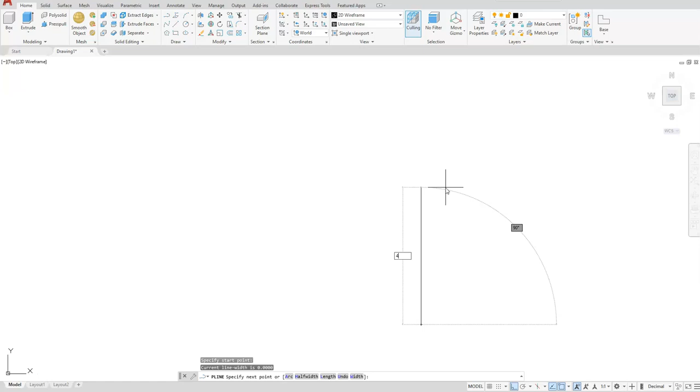Okay, so let's start with a polyline. Click here. I'll go up a distance of 46. I'll go to the left a distance of 131.

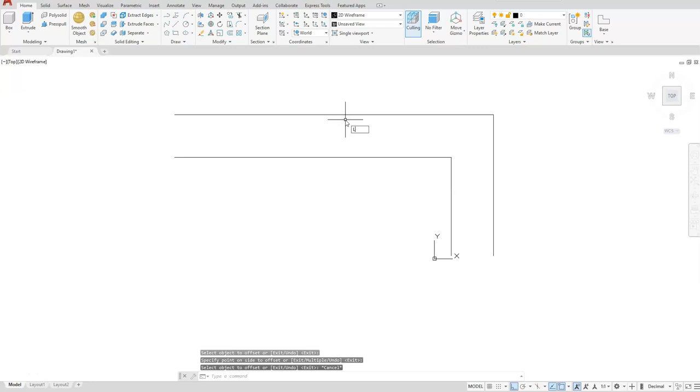Offset. Distance will be 20. I'll draw lines to connect the endpoints.

Next, I'll create a rectangle. Click this as my start point. And the other endpoint or coordinate that I'm going to need to achieve this should be 20, 46.

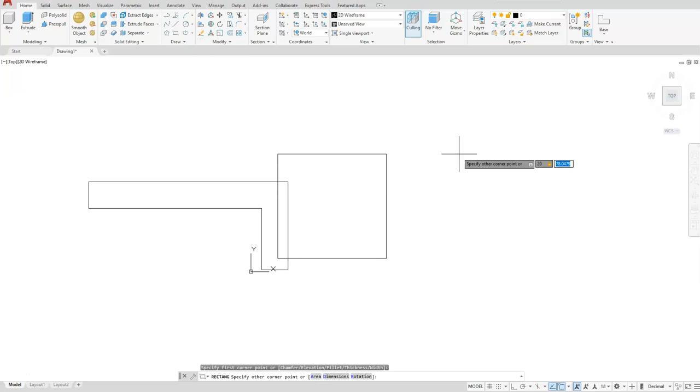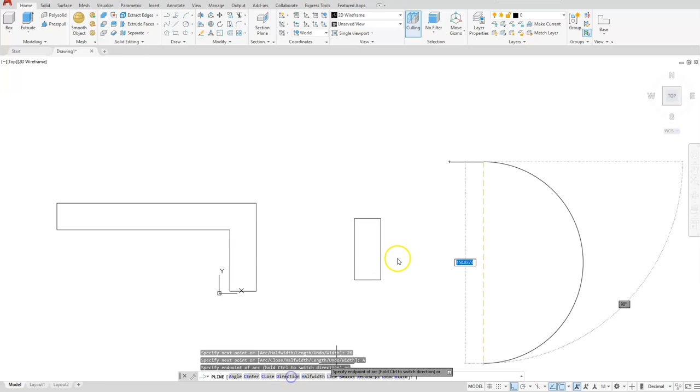Next, I'll create one of my slots, and I'll use a polyline. Go this direction, 26. Then I will switch to the arc that's on polyline. Come down a distance of 12. Switch back to line, go this direction, 26. Select arc, then close.

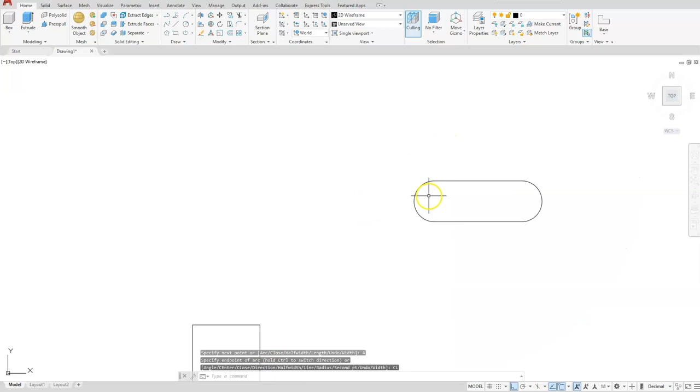Let's go ahead and create another one of our shapes that we're going to need. This is going to be the part in the front. So I'll start with a polyline. I'm going to go down a distance of 30.

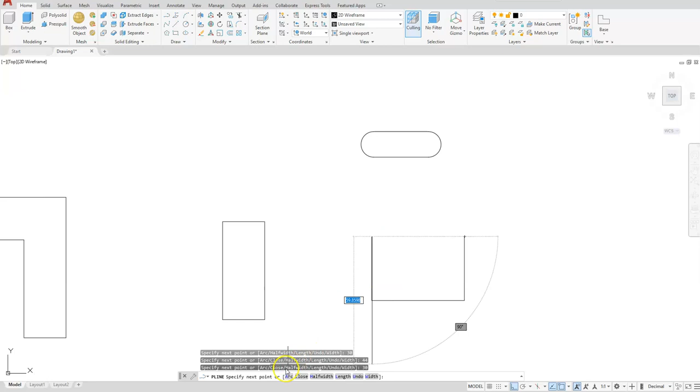Go to the left a distance of 44. Go up a distance of 30. And since I'm using a polyline again, I'm going to choose arc, and then I'll choose the word close.

I'll create a circle at the center of this arc. Circle, center diameter. At this center, the diameter will be 22.

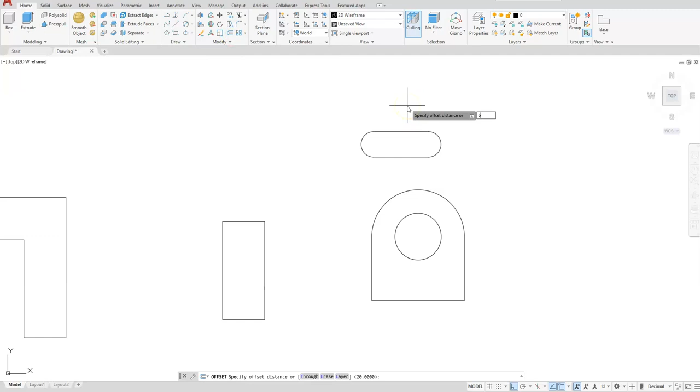On our slot here at the top, let's go ahead and create an offset. So go to offset, make your distance 6, and offset that slot.

I'll create one more circle that I'll need later. But now that I think about it, I'll go ahead and save that cylinder for using some of the primitive commands.

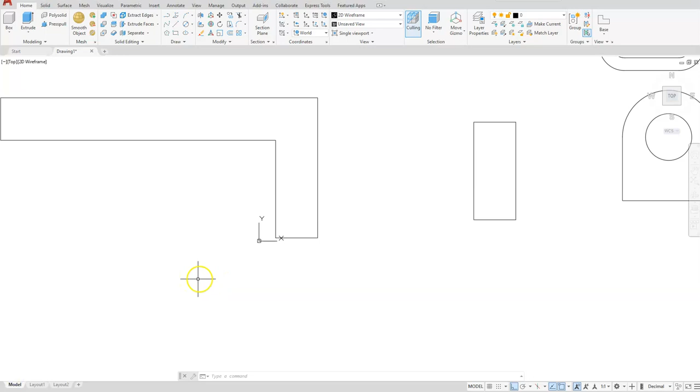Let's look at this at an isometric view.

Then I'll do some extrusions. So I'll choose extrude, select this shape.

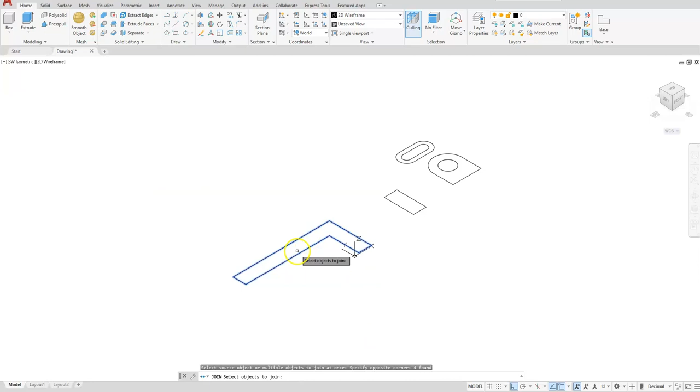And now I do notice that these shapes are two individual ones. So escape out of that command and join them first. So I'll use join and select this shape. And always check and make sure that you're getting one polyline.

Okay, now let's use the extrude command. Select this shape and send it a distance of 76.

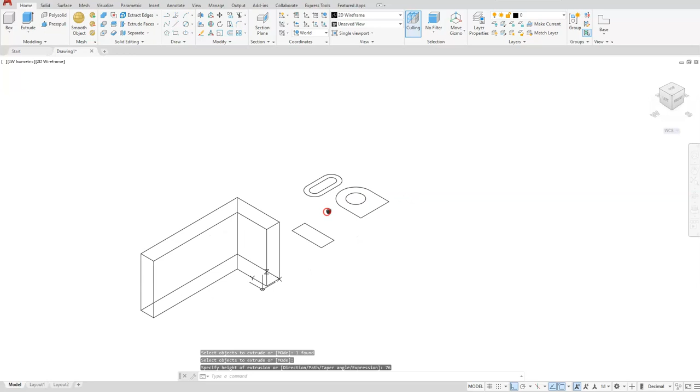Next, let's go ahead and extrude this shape. And the distance on this one will be 6.

I'm going to extrude just this outside shape. And I'm going to make sure that I'm going in the down direction or downward direction, a height of 6.

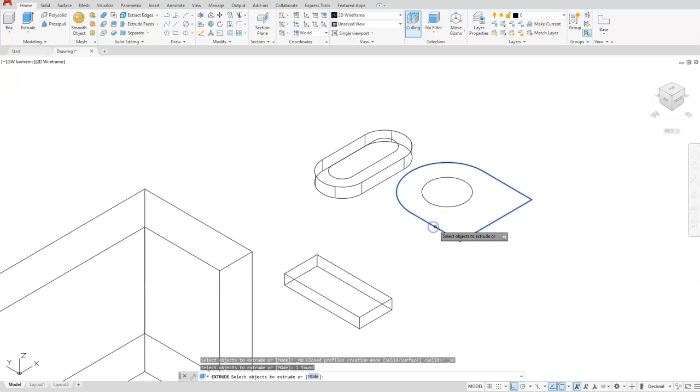And with this one, I'm just going to extrude it a very big number, but I'm only going to select this outside one. So I'll go to extrude, select that shape, and I'll come down a distance. Let's make it 80 just to make sure that it's big enough to go through our object.

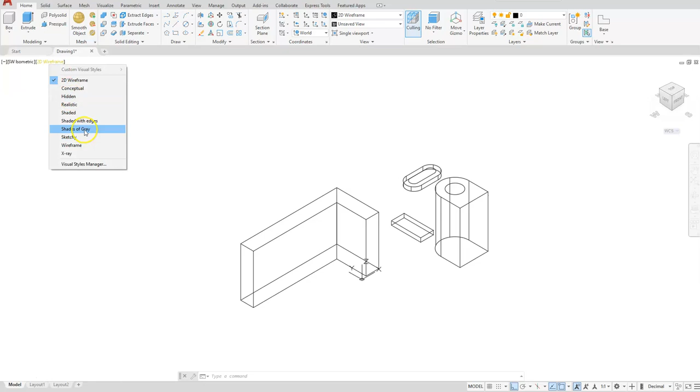Okay, so now I'm going to start turning some shapes and manipulating them the way I want them to look. So I'm going to switch over to the shades of gray. Then I will take a look at my rotate gizmo.

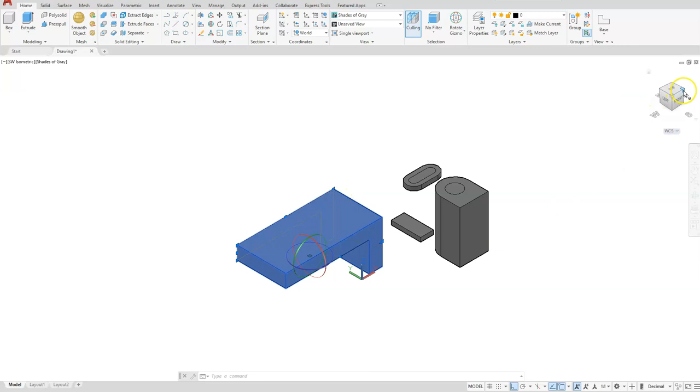Select the shape, select the red axis, and I'm just going to stand this one up. I'm going to rotate just around to this front view of this one.

And now I will put my block on the front of this one. So make sure you hit the escape button twice to clear out the rotate gizmo on that object.

Select this one. I'm going to do the red axis first, and that'll get my shape to stand up. Then I'll select the blue axis and get it to go to the side.

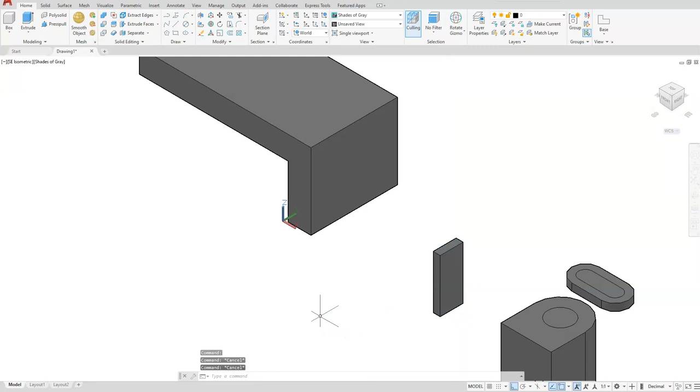Now sometimes it is kind of hard to see because I need to get this back midpoint along that midpoint. So what I'm going to do is switch to a wireframe view.

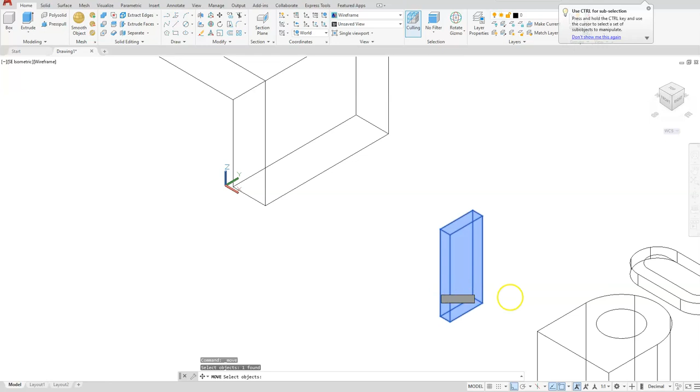Now I'll use the move command. Select this shape. Then I'm going to make sure that I'm selecting this back midpoint, and I'm going to put it at that midpoint.

Now this shape should have went up a little bit higher, and it looks like it's off about a distance of 20. So I'll use my presspull, and I'm only going to select just that face, and I'm going to pull it up a distance of 20.

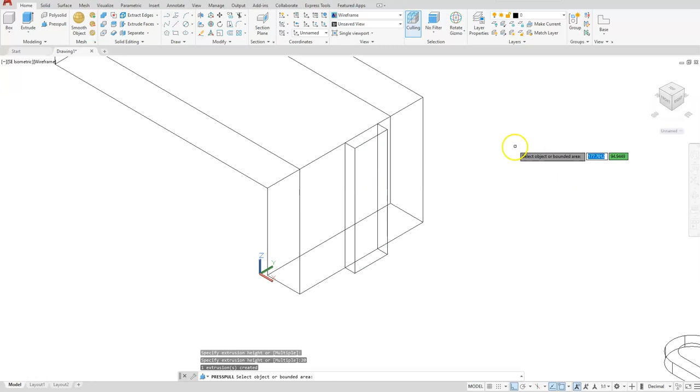These two shapes are almost ready to be union, but I'm going to go ahead and put this shape on first. Then I'll union these together.

Okay, so as long as I'm not in 2D wireframe, I'm in the regular wireframe, I'm going to select these two shapes.

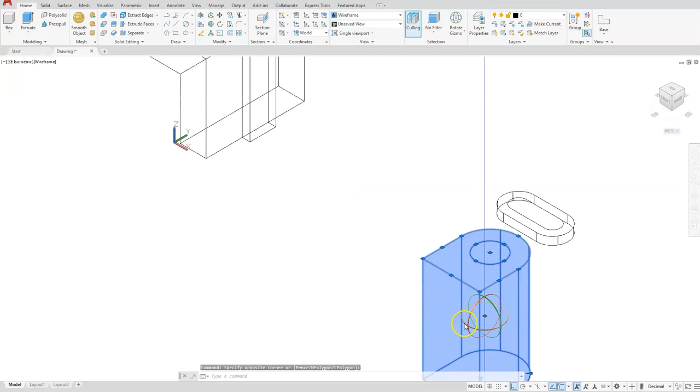I'll turn it sideways with the blue axis, and then I'm going to lay this one down flat with the green axis.

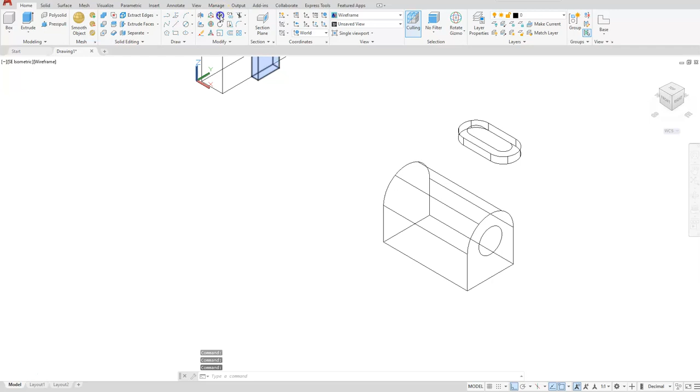I will move this shape from this front midpoint to this midpoint. So I'm just using the regular move. I'm selecting that circle and my shape. I'm going to choose this midpoint, going to this midpoint.

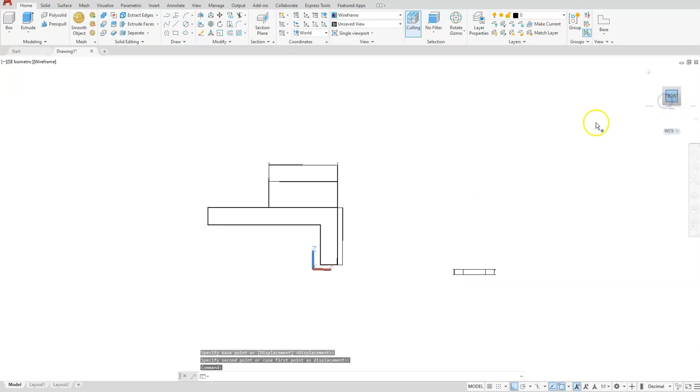If I take a look at this in the front view, you're going to see that that shape is sitting sideways, and I need to rotate that shape back at an angle of 45 degrees.

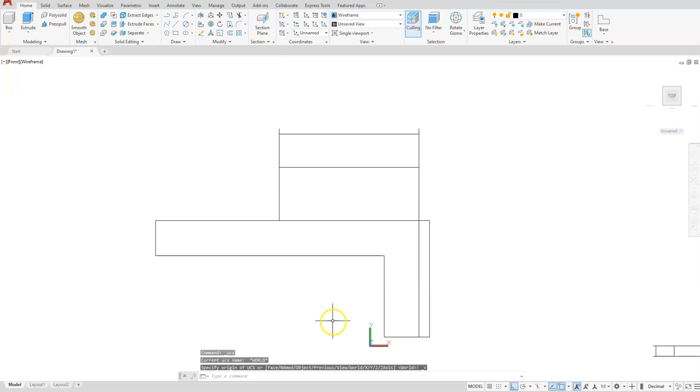So what I'm going to do is change my UCS orientation, and then tell it to align with the view that I currently have. So I have front selected. When I select that button, you're going to see my UCS down here should change. So let's select View. Now you can see that my Y-axis is pointing up and my X-axis is pointing to the right.

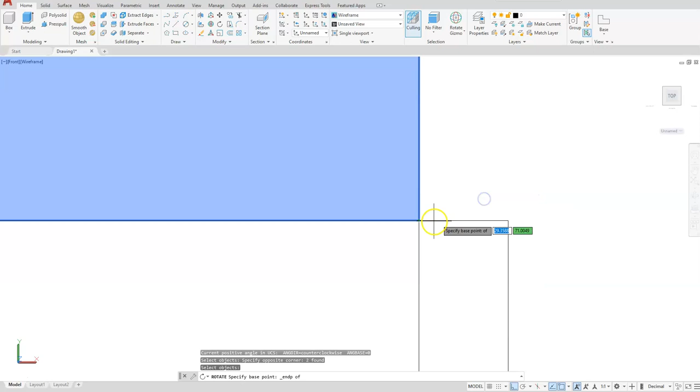This will allow me to use a regular rotate, and I'm going to use a green crossing window just so I can make sure I get that circle that's on the inside. I'm going to select this as my point of rotation, and it should be an end point there. Let me make sure that it will only select an end point.

And now I can use this regular type-in rotation. So I'm going in a counterclockwise rotation, so that number will be positive 45.

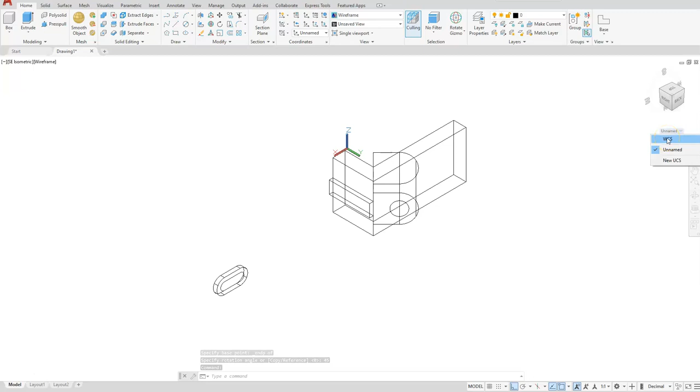If I take back and look at it in isometric, and I'm going to switch my UCS back to the WCS, which is the world coordinate system. I will manipulate this around a little bit. You can see that I do have my shape and it's going right through my object.

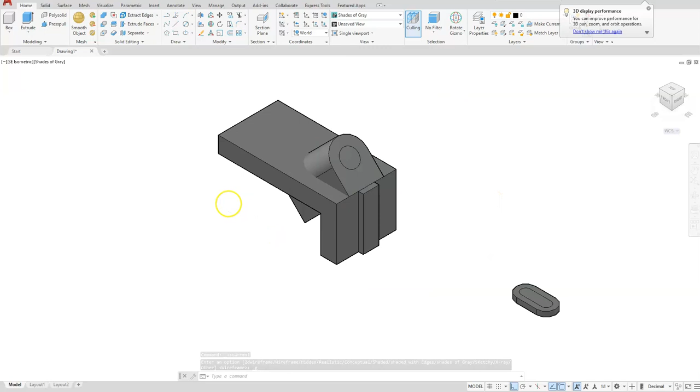Let's take a look at that in the shades of gray so you can actually see what I'm talking about. Okay, so the next thing I do is that I see that I have a part of my shape sticking through this and I want to cut it off right at this location.

So I'm going to use the slice command. In previous versions, you can remember that slice used to look like a little butter knife cutting through a shape. But it's going to be located here.

So I'll select slice. It's asking me what object I want to slice. So I'm going to select the one that's going through my part. After you're done selecting, you're going to have to pick the plane

that is the same as your cutting plane that you're going through this option, or this object. So you can see that this plane is going to be the cutting plane, or the way I want to divide my solid. That happens to be parallel to the XY axis. So if I select XY as one of my options, now it's going to ask me what point on this X and Y plane.

I'm just going to choose this endpoint. And then it asks you, do you want to keep both sides or do you want to discard one? I always just tell it to go ahead and keep both sides. And then I'll physically come back and select that and delete it myself.

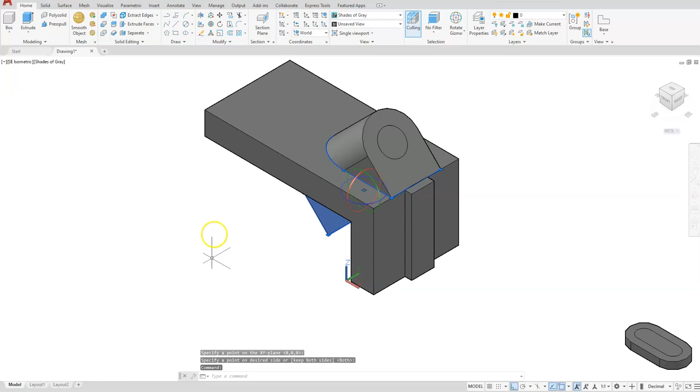So now if I look at this on the front view, you can see that that is no longer the issue of that object going through. It did slice it and it kept the side that I wanted.

I will union these three objects together. So let's go to union. Once again, when you're using the union command, it doesn't matter which order you select these in. But now they're all selected.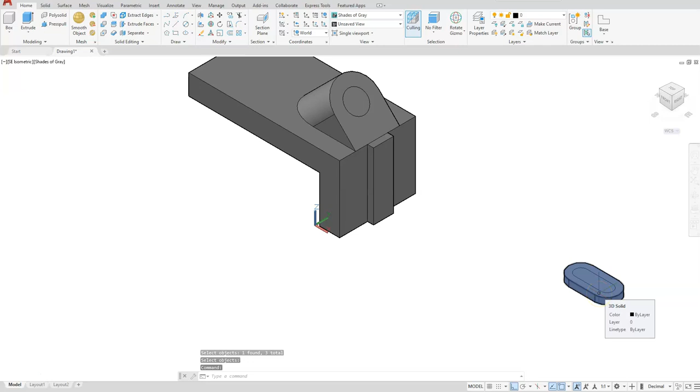Next, I'll put my slot that's located on the back. But actually, before I do that, I'm going to wait till I round these corners, and that way I'll have a center point in common with it. So let's switch over to the fillet edge option.

I'll select the radius at the bottom on your command line. 25 would be my radius.

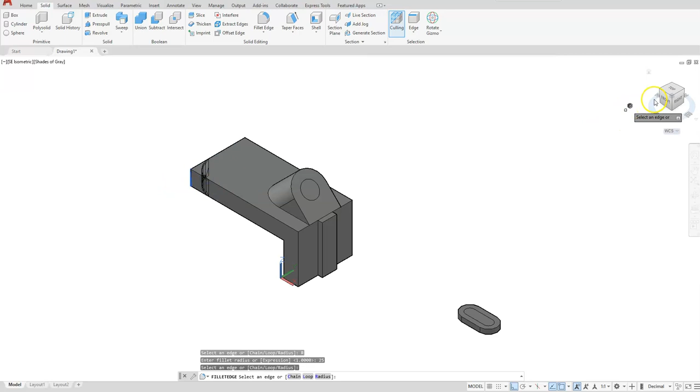Then I'm going to select these corners of what I want to radius. Once you have those two corners selected, remember the enter button to give you a preview, and one more enter will accept it.

Okay, so now I'm going to rotate this shape and make sure that you pick both of those objects. You have a solid and you also have a sketch still left over there. I'll choose the blue axis, just to get it to come sideways.

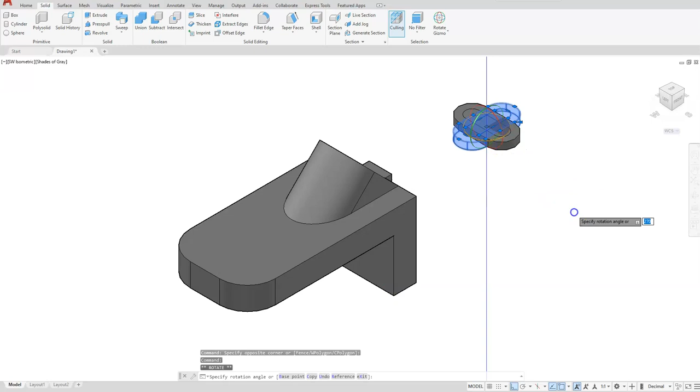Then I'm going to move this object, so I'll switch back over to the Home tab here, and I'm going to move it from the bottom center. Remember that you're going to get two centers that will appear. Choose the bottom one.

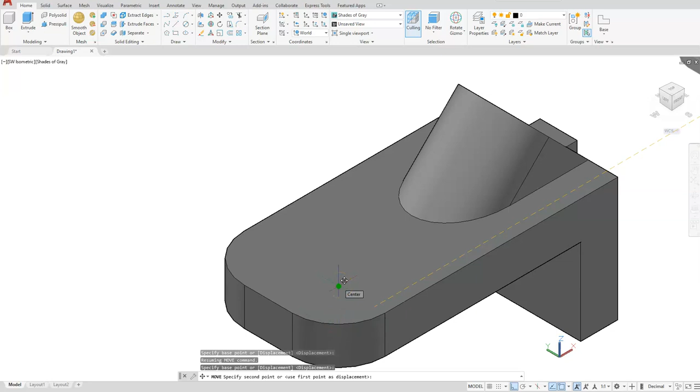And then I want to place it on the center that's located at this arc I just created. So I'll select that center. Let's go ahead and union these two together.

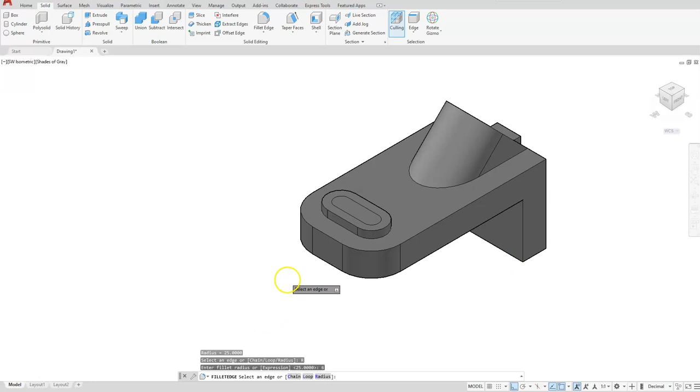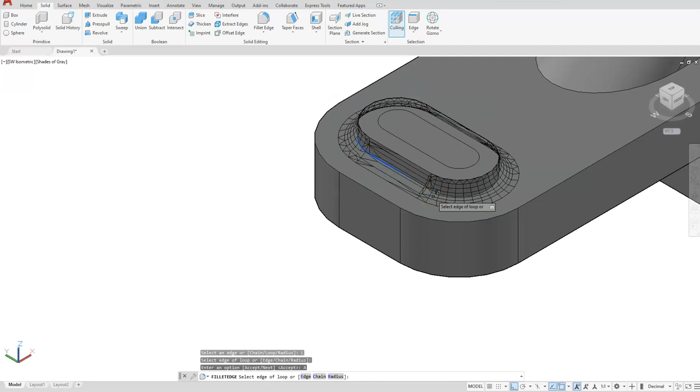Let's do a couple more fillets. In this fillet edge, I'm going to change the radius to 6, and select that bottom edge going around my shape. You can either go around and keep selecting, or use the loop option, where selecting one will loop all the rest for you. Hit Enter to give you the preview, and one more Enter to accept it.

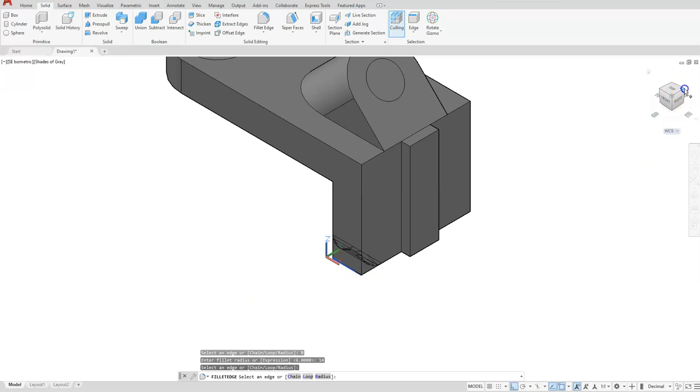Let's take a look at the corners in the back half of this. I'm going to fillet, with a radius of 14. I'll do this corner, and let's take a look at that corner.

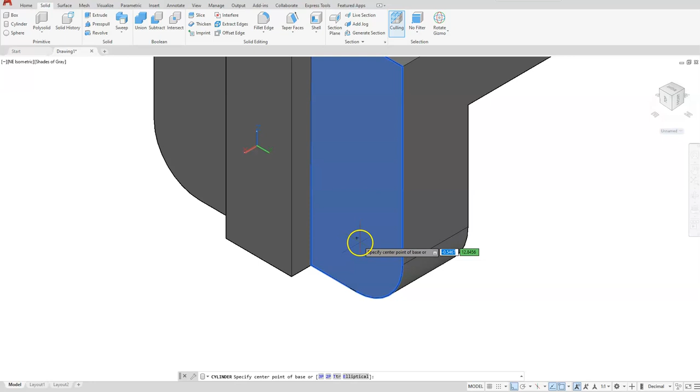Next I want to put a cylinder going through these, with a diameter of 12. So I'll choose cylinder. You can see this face highlighted, and I'm going to come almost to the edge to where my center point will show up. Once you have that, and the face is still blue, select that center point. Look on your command line and select diameter, type in 12, and give it a direction to send it, through this back face. I'll do that again on the other side just for practice.

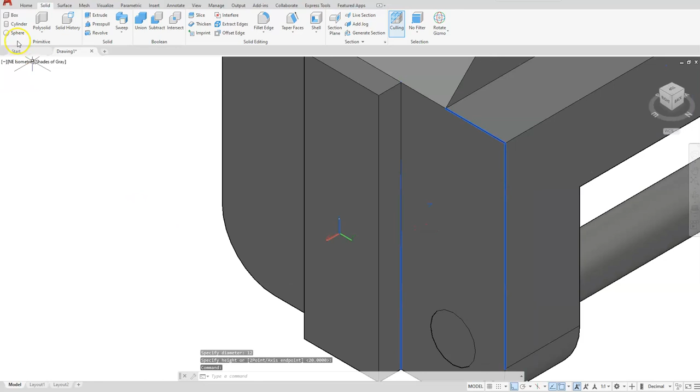So let's go to cylinder. I'm going to touch this face until it's highlighted blue, and come down to right where that arc is starting to appear. Then I'll select the center point, choose the word diameter on my command line, type in 12, and give it a direction.

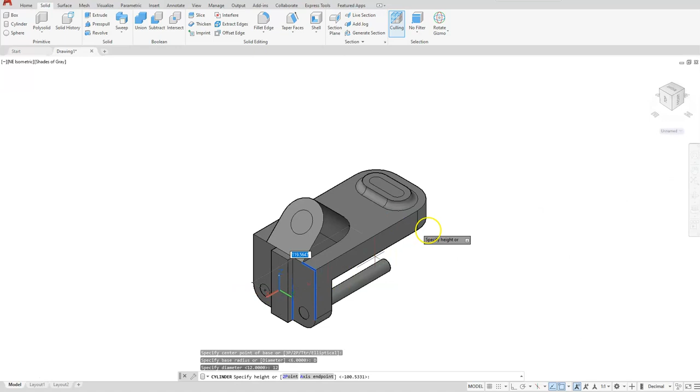Okay, let's go ahead and subtract those circles out. So I'm going to choose subtract. This is the object I want to keep, and then I'm going to select the two cylinders that I just created.

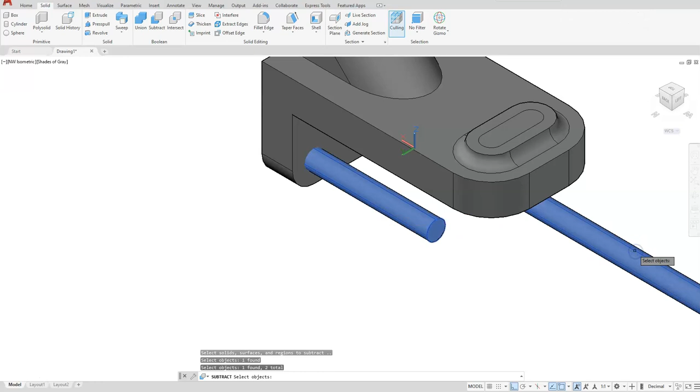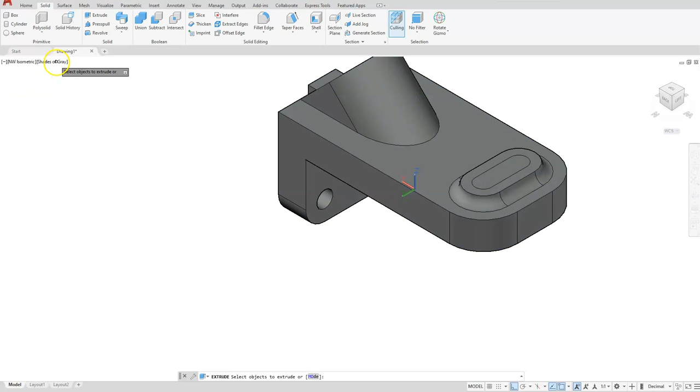Let's take out the slot here in the back. So we're going to extrude that as well. I'll choose the extrude option, and you need to get to that slot here on this face. Sometimes it's easy enough to pick and sometimes it's hard. Remember that one of the options I sometimes use if it's giving me difficulty is choosing wireframe, extrude, and then I can select that shape with no problem, or that sketch. Make sure you run it long enough so it's going through your solid.

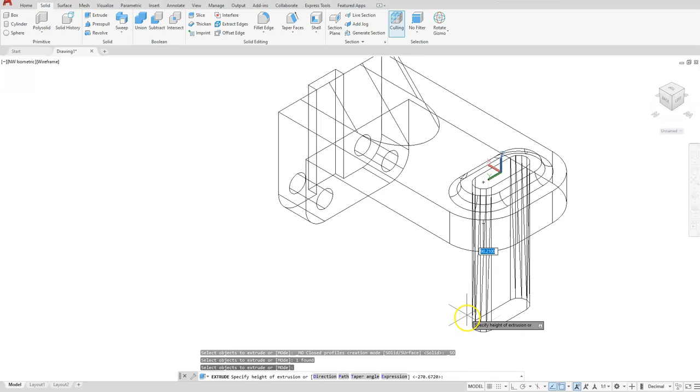Subtract. I'm going to select this object you want to keep first, then you'll select out your slot.

One more extrusion we have to take care of is this hole in the front here. This one has a specific distance it must go down, and it's telling me that it's 32. So let's use extrude, select that sketch, then make sure I'm pulling it through my shape going this direction. Type in 32. Then go ahead and subtract it: select your big shape first, then select your cylinder that you just created.

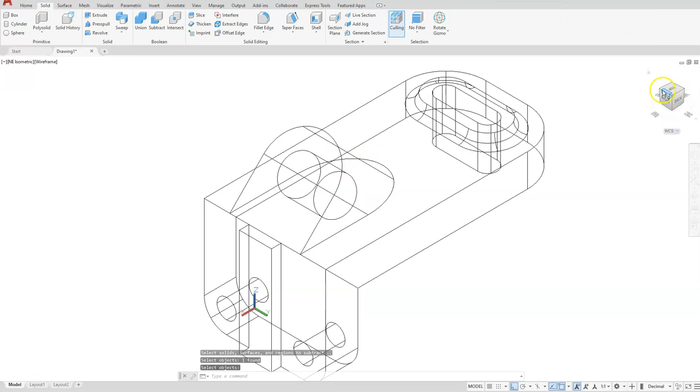Switch it back to shades of gray just to make sure everything looks the way I want it to.

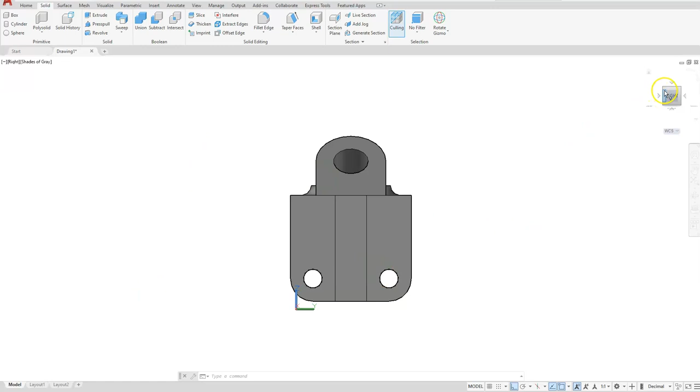In this shape I purposely made a mistake that I want to show you how to fix. I know sometimes students tell me that in AutoCAD they have to usually start over if they make a mistake. So here's a good way to fix a mistake on something that you may have created.

You can see here at the bottom that this shape actually needs to go up a little bit higher, and I think it needs to go up a distance of 14. So what I'm going to do is switch back to the Home tab, and underneath the drop down, choose the one that says Move Faces.

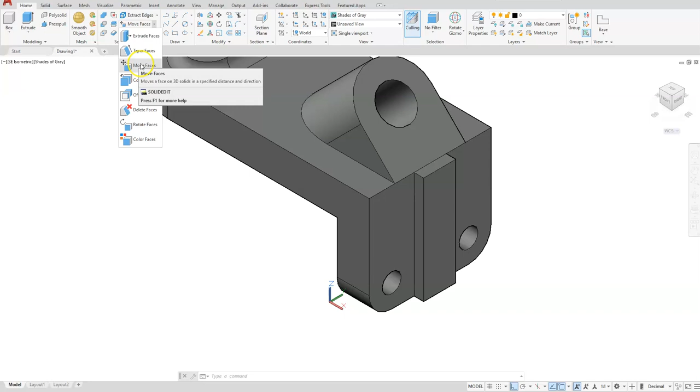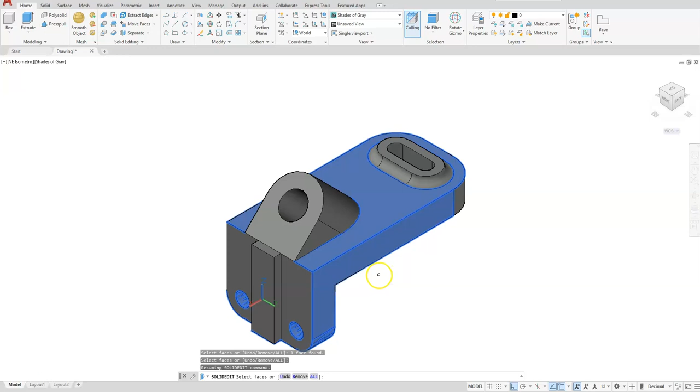What I'm going to select is the inside of this hole and this one. I'm going to switch to the bottom view here, and select this face, and this face. Now if I go around a little bit, sometimes you'll see it select some extra faces. You can hold down the Shift button and deselect the faces you don't want. So I'm making sure I have these faces selected: this arc, this one, the two insides of those cylinders, and this very bottom face.

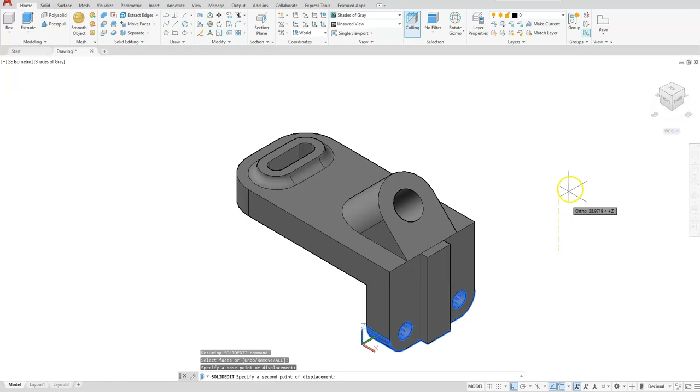Once you have those selected, hit the Enter button. Click a location or a base point, so I'm just going to click somewhere along here. Then I'm going to go up, and you can see I'm going orthographically up, and it says a positive Z direction. I'll type in 14. Make sure you hit exit, and one more exit. And that's how you would repair something if you notice there's a dimension wrong — you can fix it.